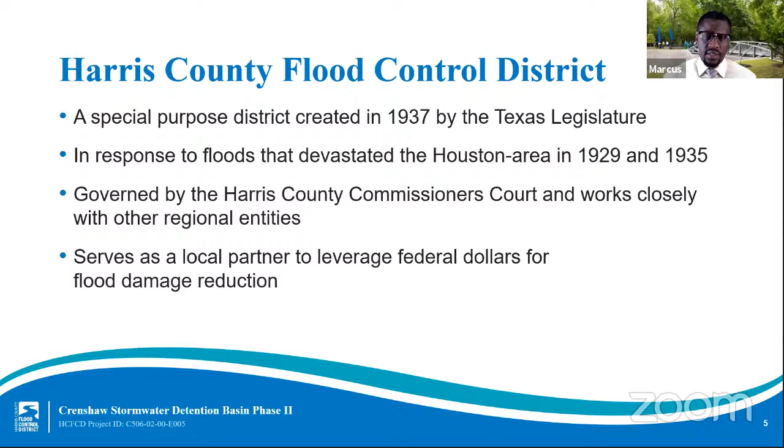The mission of the Harris County Flood Control District is to provide flood damage reduction projects that work with appropriate regard for community and natural values. One of the most difficult challenges we face is constructing effective projects that are sensitive to community and natural values in a highly urbanized area.

Harris County includes 22 main watersheds, totaling approximately 1,800 square miles and more than 2,500 linear miles of channel. 2,500 miles is approximately the distance from New York to California. A watershed is a geographical region of land that drains to a common channel or outlet. Each watershed has its own unique characteristics and needs. The project we're presenting tonight is in the Sims Bayou watershed, located in southern Harris County.

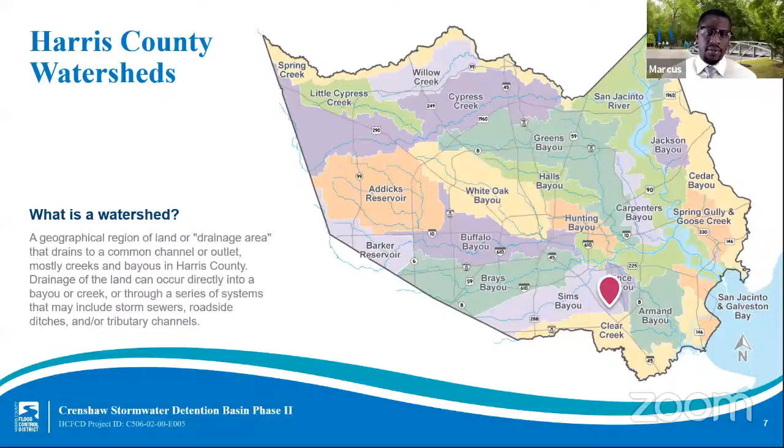Our area is flood prone, and here are some reasons why. We experience extreme rainfall, including tropical storms and hurricanes. We have flat, slow draining land, and we also have clay soils that do not soak up excess rainfall quickly.

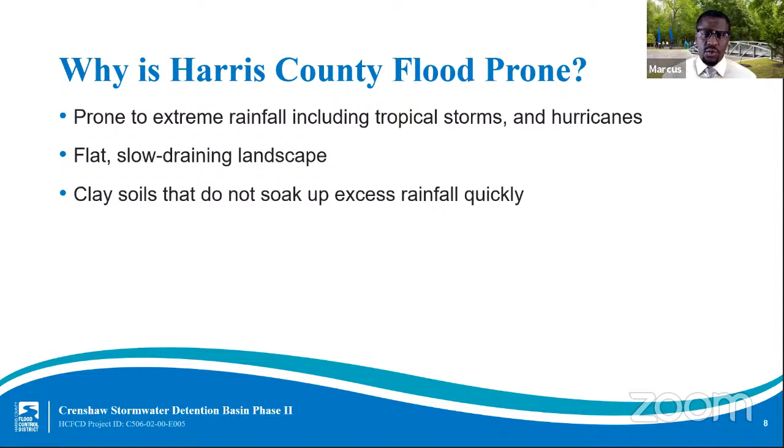While the Flood Control District plays a critical role in flood risk reduction, we are one of several entities involved in these efforts in our region. When rain falls on your roof, it flows through several jurisdictions such as streets and drains managed by Harris County Engineering Department, a municipal utility district, or cities such as the city of Houston, before it flows into a larger channel, creek, or bayou that the flood control district owns or maintains.

This slide illustrates the various jurisdictions, which sometimes we even share with other entities. Inside neighborhoods, as shown on the left side of this illustration, storm sewers and roadside ditches collect stormwater runoff and start the process of moving it away from streets and homes. Storm sewers and roadside ditches are the responsibility of the underlying municipality. The larger bayous and channels that take in the collected stormwater and move it through our drainage system to Galveston Bay are the responsibility of the flood control district. This is shown on the right side of the illustration.

In the middle is a stormwater detention basin, sometimes constructed by the flood control district. When storm sewers are increased, this creates an increase in runoff. Since it is our policy to avoid impacts to property downstream, detention basins have to safely take in and temporarily store excess stormwater during heavy rain events. Often, we partner with Harris County precincts, utility districts, and others to add recreational amenities such as trails to these basins and along our channels.

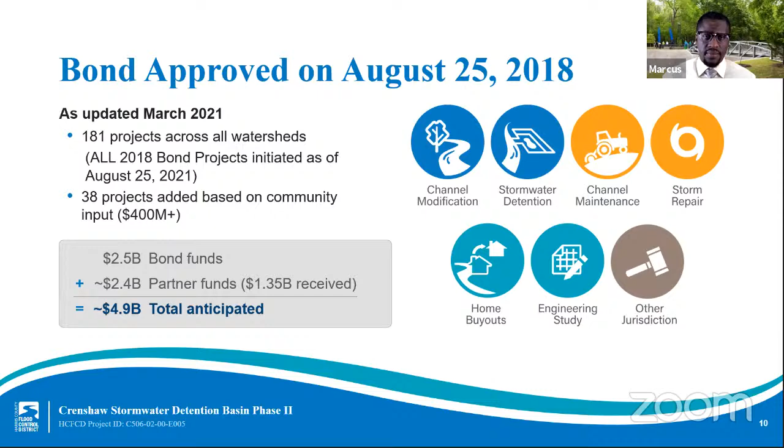While the bond was for $2.5 billion, the full cost of every project in the bond table is almost $5 billion. So we made it clear from the outset that we would need funding partners to fully construct the projects in the bond program. As I've mentioned, we've had some success so far, having secured more than $1.35 billion in partner funds. This graphic illustrates the many sources of those partnerships, including federal, state, and local funding that the Flood Control District is working to secure for Harris County.

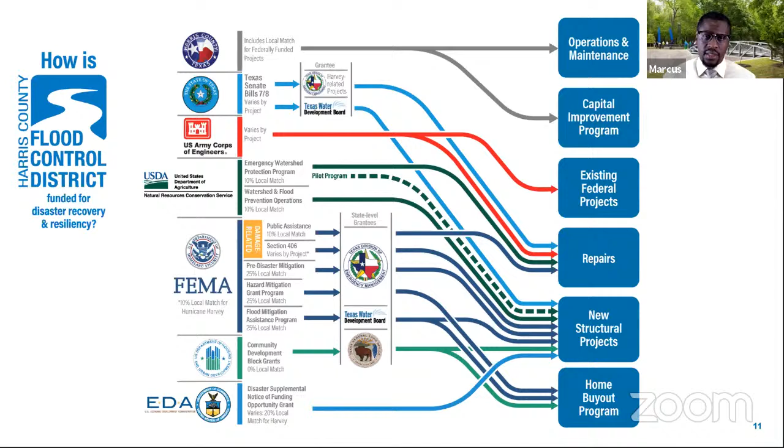Each agency has its own definition of eligible projects and its own requirements for local match funding, so the Flood Control District works diligently to match projects to the right partnership opportunity.

We will now move into the part of the program that is specifically about the Sims Bayou watershed and phase 2 of the Crenshaw Stormwater Detention Basin project.

The Crenshaw Stormwater Detention Basin is located within the city of Houston, east of the intersection of Galveston Road and south of Shaver Road. The purpose of the proposed detention basin is to provide additional stormwater storage for channel C106-08-00. This project is an extension of an already existing stormwater detention basin in the area and will add additional flood mitigation for the Arlington Heights subdivision.

This project is currently in the design stage of the overall project lifecycle. This stage is expected to be completed in fall of 2021. The project will go to bid in winter of 2021-2022, and construction will begin in the spring of 2022.

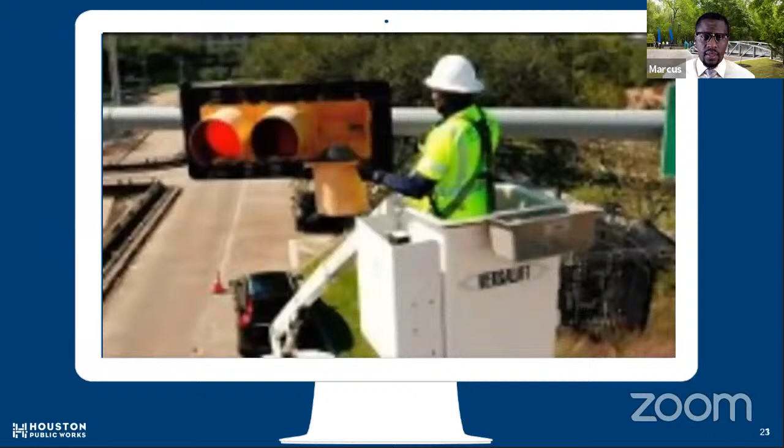First, I'd like to play a brief video highlighting the services provided by Houston Public Works.

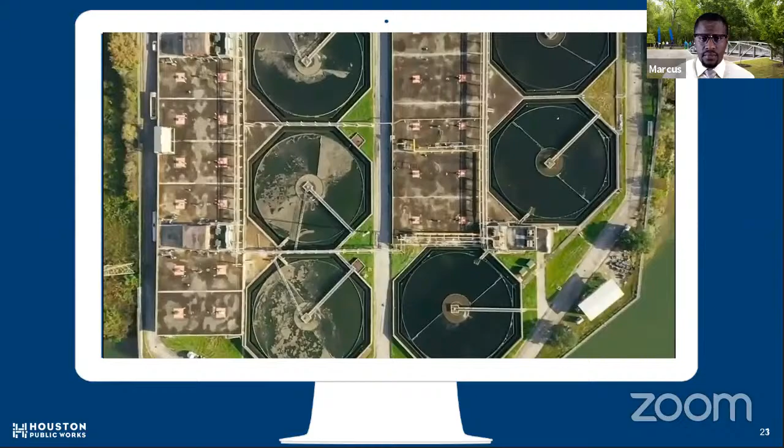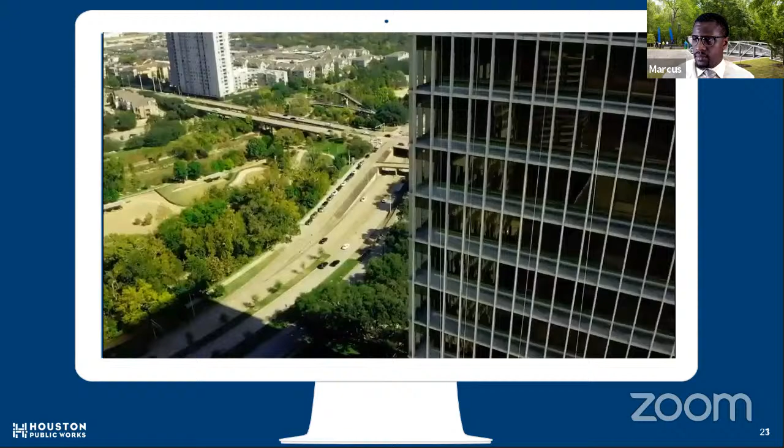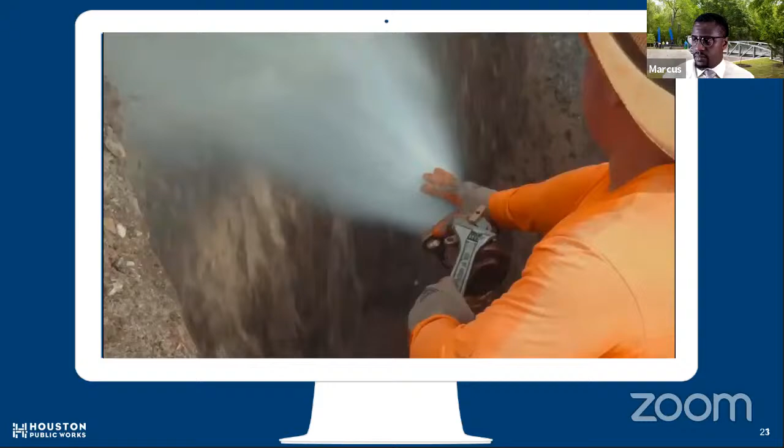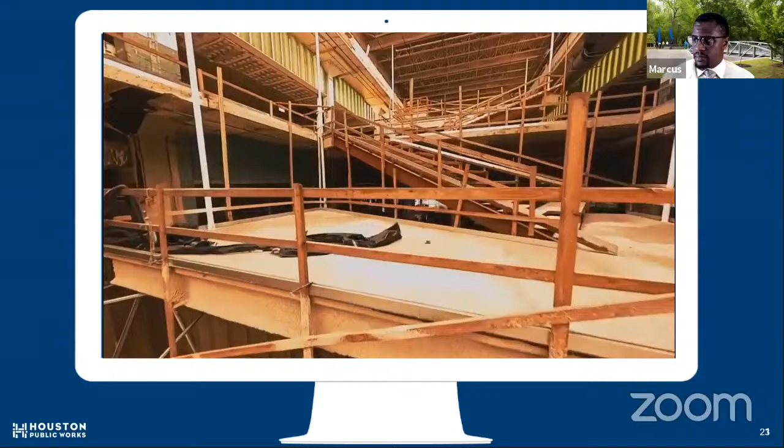Houston Public Works is responsible for the daily tasks you may take for granted. You may not notice us, but we work around the clock to support you. We are the foundation for life in Houston. Houston Water distributes enough fresh water to fill the Astrodome 4 times a day. Transportation and drainage operations handles 16,000 miles of streets, signs and street names and thousands of drains. The Houston Permitting Center regulates hundreds of projects so you can work, play, and live safely. Customer Account Services ensures 2.1 million people have access to safe drinking water with efficiency, accuracy, and flexibility. Capital Projects manages the critical improvements that make Houston better every single day. Houston is always moving towards growth, innovation, and progress. We are the largest, most diverse public works organization in the country. We are one team with one purpose. Together, we create a strong foundation for Houston to thrive.

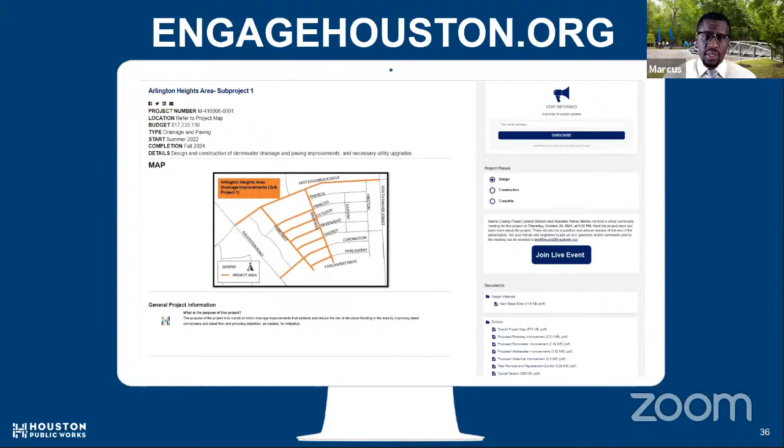The city is nearing completion of the design phase for subproject 1. The construction phase will begin in spring of 2023 and will be completed in 2025. The design phase for subproject 2 will be in 2023, and the construction phase will begin in 2025.

I will now turn this back over to Sparkle to kick off the Q&A.

Sparkle, you're muted.

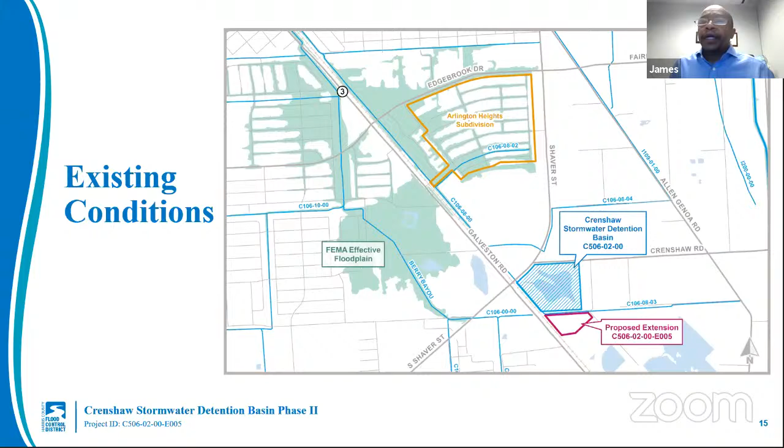This is the Arlington Heights project. We basically have two sub-projects, sub-project 1 and sub-project 2. Sub-project 1 will need to be completed before we can start working on sub-project 2. Sub-project 1 is expected to start construction in spring of 2023 and should take about two years, going all the way to spring of 2025. We'll then have sub-project 2, which begins in fall of 2025, and that should also take about two years to complete.

Sherry, this next question is one we get often: how is this project funded? This project is funded through the city's capital improvement program. The funding sources include drainage fee, combined utility service for water and wastewater improvements, and property tax.

James, the next question is: will there be any road closures or traffic impacts during construction? Yes, we do expect there are going to be road closures as we work on the project. However, the project is set into phases. The City of Houston has a traffic control plan in place, and anyone affected during construction will be informed prior to the construction taking place. With this plan in place, we'll ensure that traffic continues the best we can, with minimal impact to your commute.

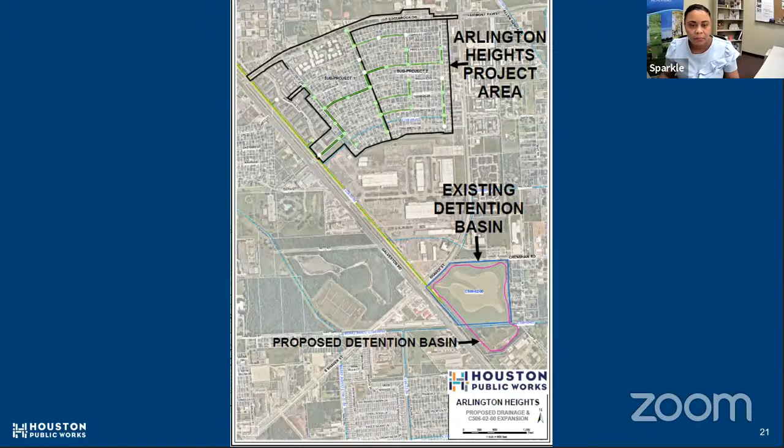I'm going to pass that question to Jonathan St. Romain. Thanks. So

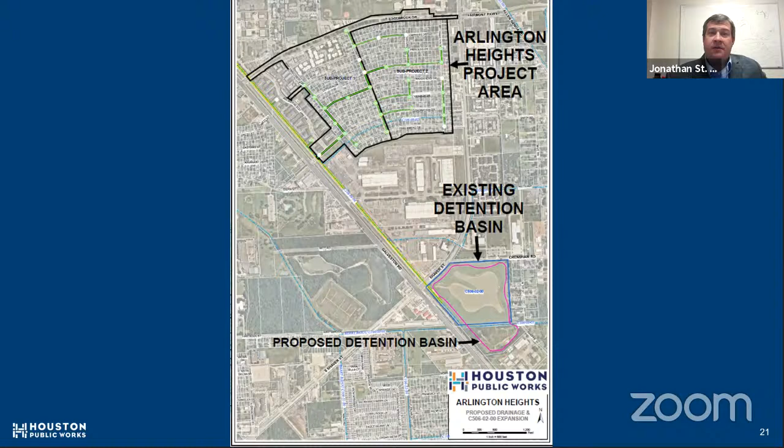This basin does not technically work with the South Shaver Basin in terms of needing to be built at the same time or together. They do happen to be close by and are in similar locations within the watershed, and so they do help flood mitigation in similar areas. They will help reduce flood risk in the nearby streets and neighborhoods, but they are technically not related to each other or part of the same project.

All right, thank you. Marcus, will you take this next question? What will the project accomplish?

So the project will accomplish two things. One is increasing the conveyance within the internal system of the neighborhood, which is the Arlington Heights subdivision drainage improvement project. The second thing it would do is mitigate any impacts related to that increase in storm sewers by extending the existing detention basin at C506-02 to provide additional volume for the additional flow we expect to be introduced into the channel with the increasing of the storm sewers.

All right, Emmanuel, our next question is for you. What stage is this project?

Thank you, Sparkle. The Crenshaw Stormwater Detention Basin project is currently in the final design stage. This stage is expected to be completed in fall of 2021, and the construction process is anticipated to start in spring of 2022. For the Arlington Heights project, it's currently in design, and bids will go out next year, and the contractor will be selected. Once a contractor is on board, the City of Houston will schedule a virtual community meeting to discuss how to prepare for construction. The construction is to be completed in 2024.

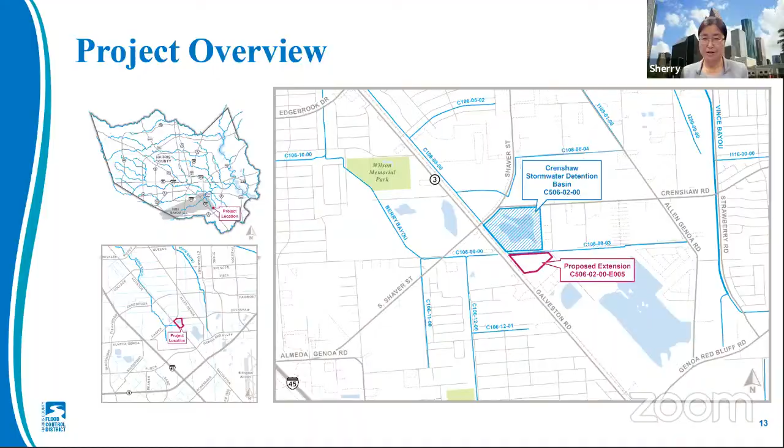Yes, Sparkle, thank you. The short answer to that question is yes. Our contractor will make sure the homeowner or anybody visiting the home will have accessibility to and from the home at any time. There will be a short time where you may not be able to park your car on your driveway while they're working on that portion within the city right of way. During that time, it will be temporary, and we will work with you and your neighbors to see whether you could park your car on a nearby street.

All right, Jonathan, we have a question on traffic coordination. Will there be traffic coordination with the local schools like Yes Prep?

Sure, yeah, we will coordinate that as much as possible. I don't know exactly where Yes Prep is, so I can't speak specifically on that spot, but in general we do coordinate when we have these big construction projects that put a lot of heavy construction traffic and dump trucks out on the streets. We do coordinate that with the surrounding areas. I know sometimes our questions can get very specific to our neighborhood, community, or specific home. For those questions that we aren't able to answer in detail in this format, I want to remind everyone that we will be following up after the public comment period. You'll receive a response from the Flood Control District and/or City of Houston Public Works. So we do want to make sure we answer all of your questions.

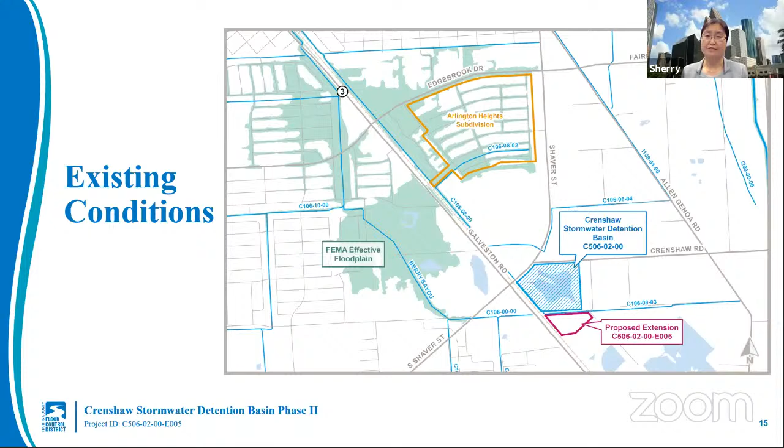Is there a plan to open Coronation Street from Galveston into the neighborhood? The map shows the drainage improvement, but currently the street doesn't connect from Arlington Square Street. Okay, short answer for that is no, we will not open the street. Yes, the drainage will go through, but on the surface you will have the same condition after the project is done.

Okay, thank you. All right, our next question is for you, Marcus. This is one of those cases where we know what a detention basin is, but a lot of the general public does not. Would you explain what a detention basin is?

Yes, so the best way I can explain it is that it's an excavation of soil below the natural ground as it exists today. It serves one of two purposes. One would be to mitigate an impact that results from increasing the size of a channel, storm sewers, or roadside ditches, preventing impacts from transferring downstream. Or two, it could serve by itself as a flood damage reduction tool within the Harris County Flood Control District toolbox. It works by taking flow off the bayou to prevent it from going into streets and homes and getting outside the banks, holding it there. Once the storm passes and the channel starts to recede, it lets that water out slowly. So it could serve one of those two purposes, or at times both, which we refer to as regional facilities.

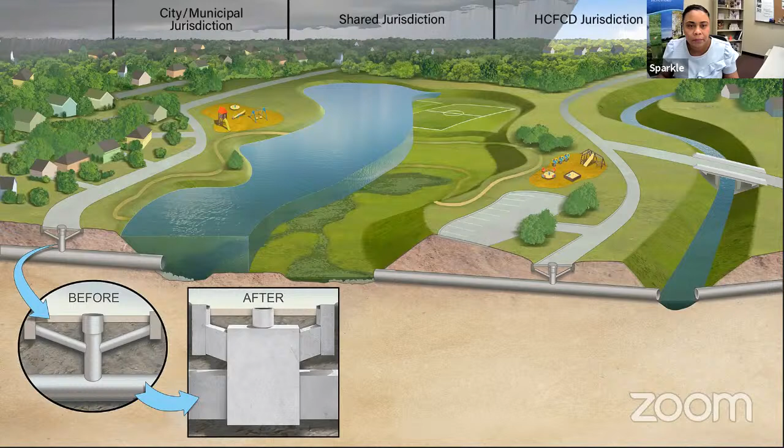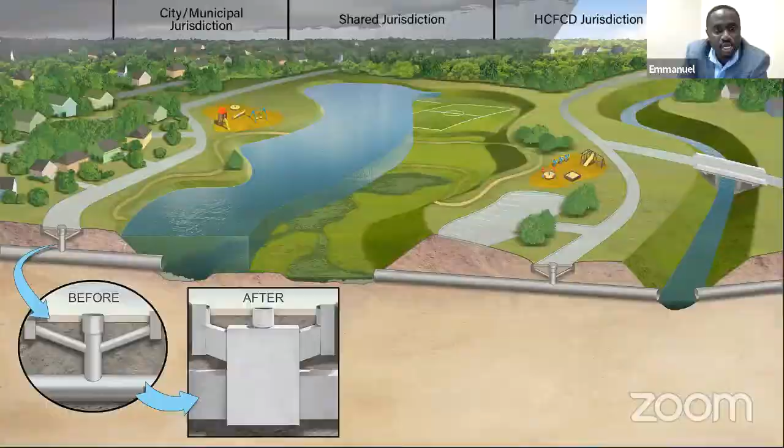All right, thank you, Emmanuel. The next question is, why are there multiple phases to this project? Thank you, Sparkle. For the Crenshaw Stormwater Detention Basin, the second phase was added due to the availability of an additional tract of land that could be used to mitigate the drainage improvements at Arlington Heights. Now, city representatives will address the phasing of their subdivision project.

All right, thank you. Marcus, here's another question. If you're improving flooding in this area, are you just flooding another area as a result?

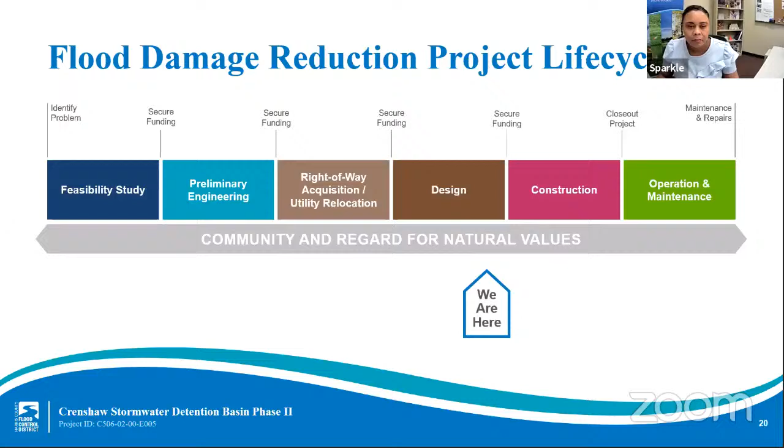Yes, and that's again another good question, but the answer is very similar to one I've mentioned a couple of times already. Our policy, the policy of the flood control district, is to not transfer risk or cause downstream impacts. It's something we hold developments to, as well as ourselves and our partners across the greater Houston area. There are engineering analyses that take place where we have to prove to ourselves, and have others prove to us, that the project being constructed doesn't transfer flooding risk to another area. Specifically for this project, the detention basin is upstream of where the improvements are happening. But what it's doing is taking flow off the channel before it goes downstream, allowing the City of Houston to increase the size of their storm sewers to get the water out faster. So the elevation, what we call the existing condition versus the proposed, is actually lowered upstream below the top of banks so that additional flow can be added further downstream.

Marcus, do you mind if I tag along a little bit to that one? Yes. And Sparkle, do you mind going back to that overall regional view, please, with all the projects?

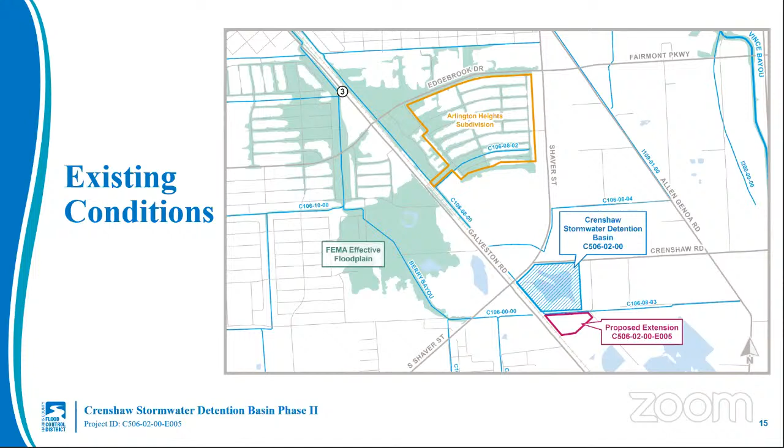Our next question is: how can I learn more about the projects going on in Sims Bayou watershed? We have a wealth of information on our website, and I will never miss an opportunity to encourage people to log on to hcfcd.org and find out more about their watershed of interest. If you're interested specifically in Sims, please log on to hcfcd.org/Sims. We encourage you to check it out - we are constantly updating the website.

This next question is for Emmanuel, from Shayla. Shayla asked, what are your plans for the Crenshaw Detention Basin? All right, I'll pass that on to Jonathan.

Sure, let me turn myself on here. Our plan for the Crenshaw Detention Basin is to expand what you see out there today. If we can look at the map that shows what's existing - there we go. The polygon, the shape you see down there on the south outlined in purple, is our proposed extension of the stormwater detention basin, and everything to the north is what exists there today.

That shape highlighted in purple represents the parcel, the tract of land that the flood control district has purchased. When this goes to construction, you'll see lots of excavation in that area - excavators and dump trucks hauling dirt and material away, so that the parcel of land that's just a flat field with some trees on it today will be joined in with the existing detention basin, becoming one much larger detention basin.

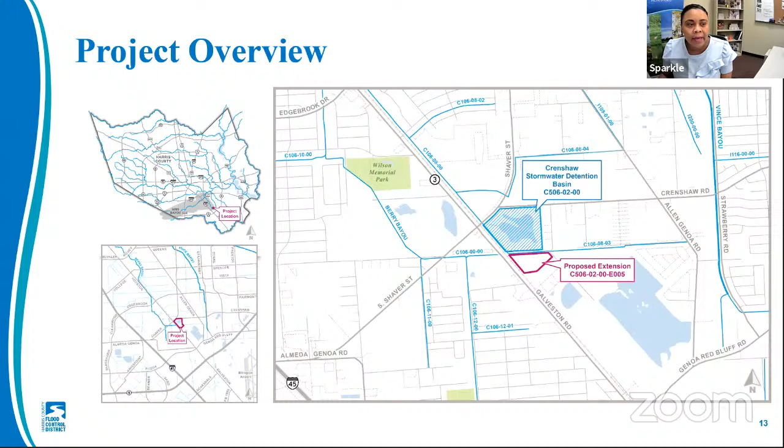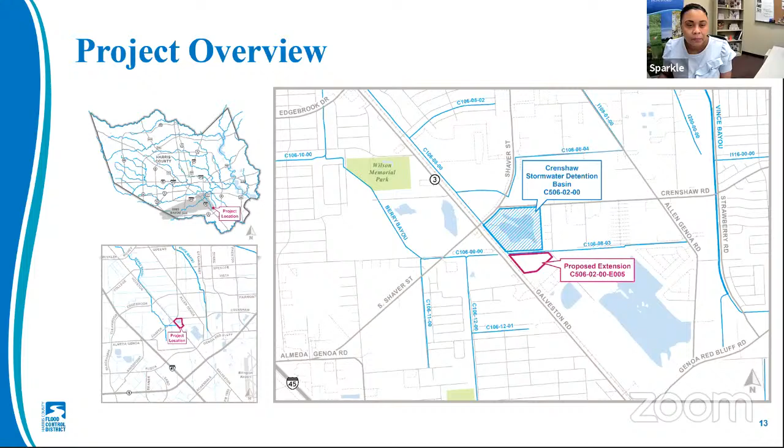So the project overview here, we're looking at two projects. One project, Harris County Flood Control District is leading, and the other, the City of Houston is leading. The Flood Control District's project is to expand an existing detention basin to provide some extra detention volume.

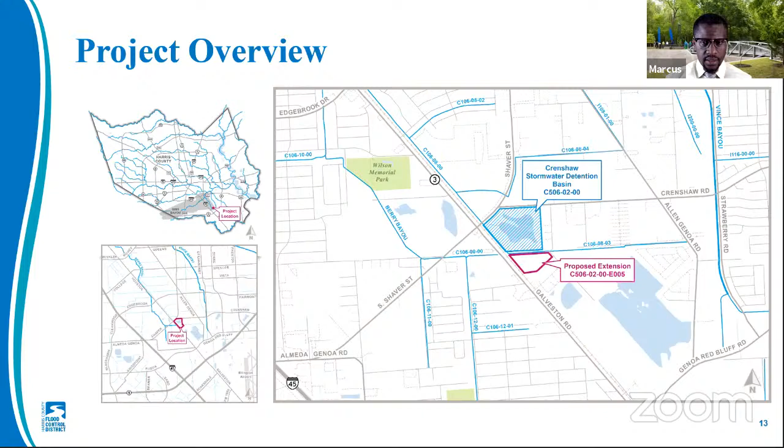Next slide, please. So our current timeline for the project, we're currently in the design phase. We plan on wrapping this up fall or winter of 2021, 2022. Then in winter of 2021, we plan to go into bid and start the construction process in the spring of 2022.

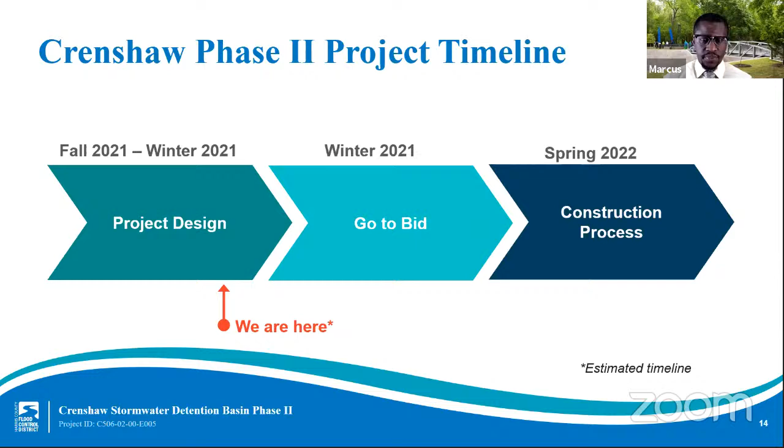So the existing conditions of today, we're showing here what you see in the teal color, which I may have said was blue last time, is the actual FEMA effective floodplain for C106. You'll notice some of the green areas going into the subdivision, which represents the riverine flooding. The actual depths of inundation typically experienced by the neighborhood is probably more than this, just because there was an internal system issue that needed to be developed as well. To the south of that, you see where we plan on extending the existing detention basin C50602.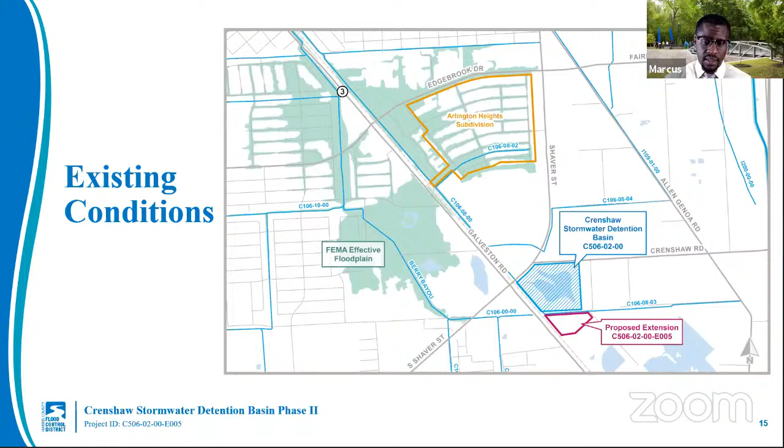Here's an exhibit of where we plan to extend that basin, along with an artist's rendering of what that basin would look like. The primary objective of this project is to reduce flooding, and also provide the City of Houston with some mitigation volume for their project in Arlington Heights. Again, this would just be an extension of the existing facility onto vacant property to the south.

So this exhibit is meant to show how that detention basin functions. Soil is excavated from what I previously called natural ground - this would be the area between where it says detention storage. Imagine all of this is full of soil or dirt; we excavate that out so that water from channel C106 08 can flow into the channel during major storm events, and during normal events it'll just capture runoff from areas around it.

So once C1060800 becomes full, the detention outlet shown on this exhibit holds the water in and allows it to slowly go back into the channel as the channel water starts to recede. Once the elevation in the channel is higher than the basin, or they're the same, that water is held until there's enough difference in elevation between the detention storage and the channel to allow that water to go out slower after the storm has passed.

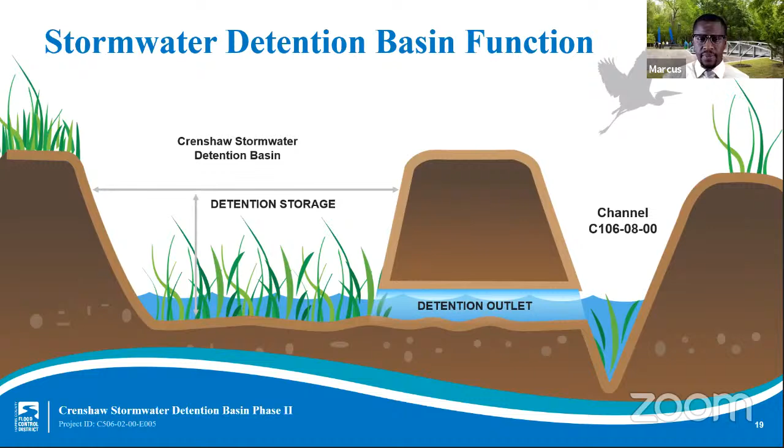This exhibit shows what I just described, with the water starting to come out of the detention outlet once the elevation in the channel has receded. As I mentioned, we are currently in the design stage, planning to have that wrapped up in winter of this year and move into construction by spring of next year.

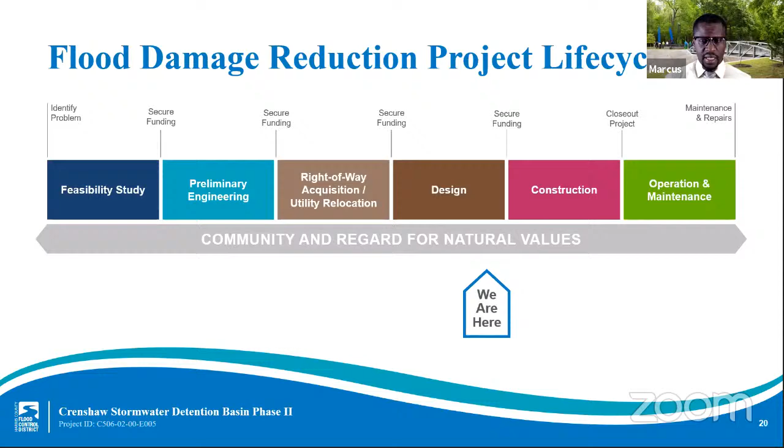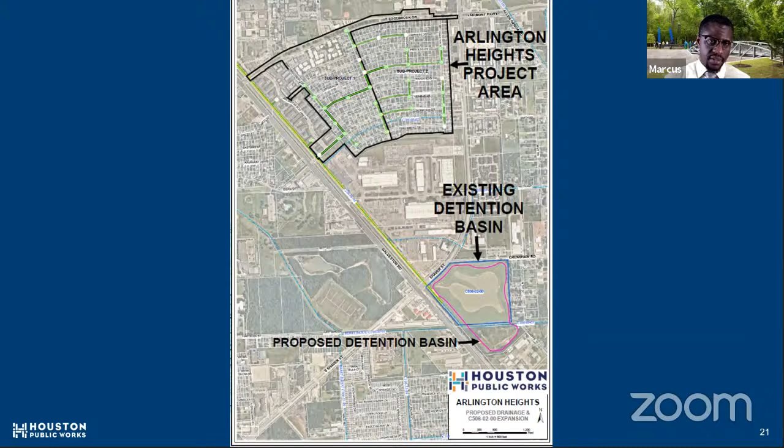This overall map gives you a further zoomed-out view of the existing and proposed detention basin and sub-projects 1 and 2 of the Arlington Heights project area, which I will discuss now. I don't think we need to play the video again. There we go, thank you.

So the area to the west, in the west part of the subdivision, is sub-project 1. The area to the right in green is sub-project 2. The city plans to construct sub-project 1 first, followed by sub-project 2.

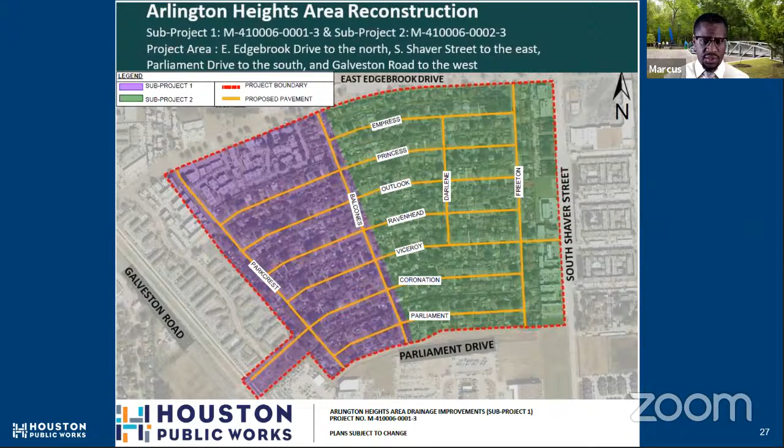Marcus, you're muted. Sorry, did I accidentally mute myself? I think so, okay.

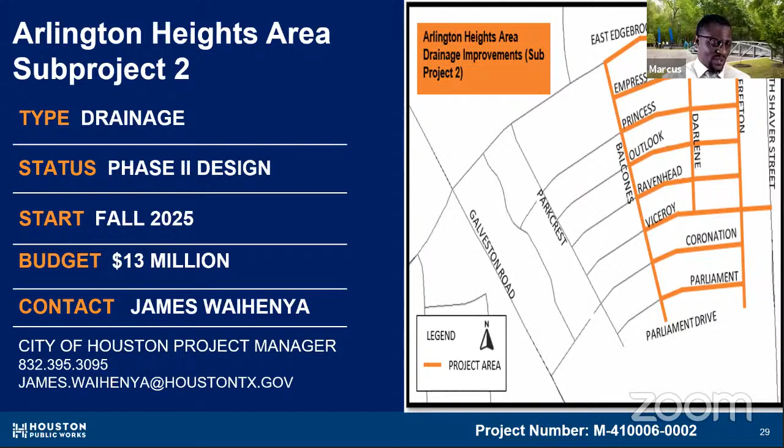Sub-project 2 is also a drainage project. It is currently in phase 2 of design, with construction start in 2025 and a budget of $13 million. James Waihenya is also the project manager for this project.

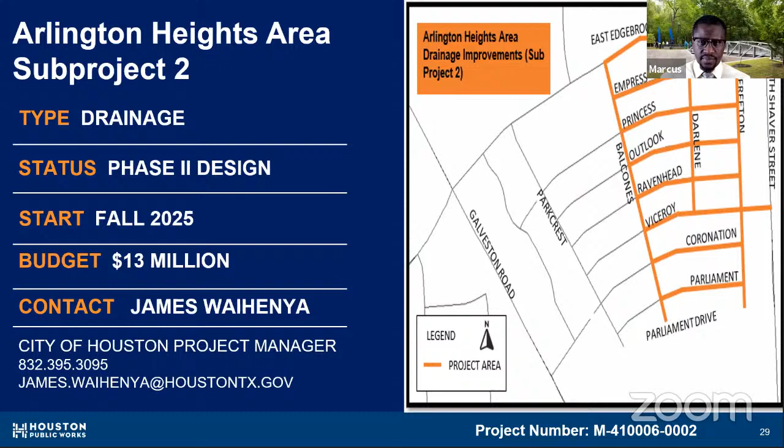The City of Houston has several improvements planned. These include storm drainage system reconstruction with 5-foot sidewalks and 4-foot buffers, addition of new streetlights, water line replacements per city standards, and storm sewer replacements also per city standards.

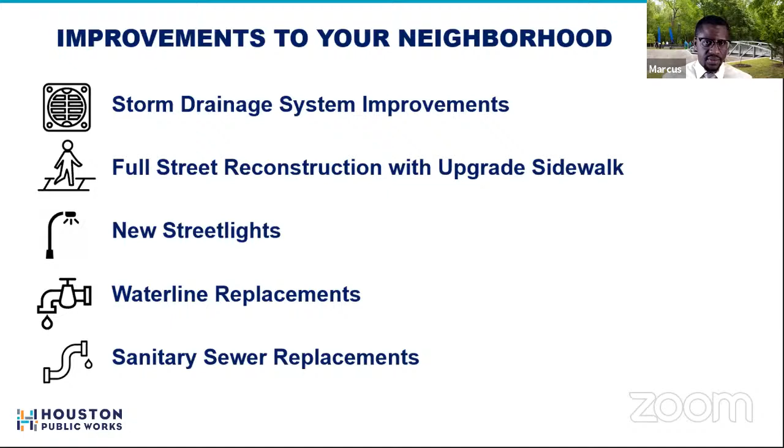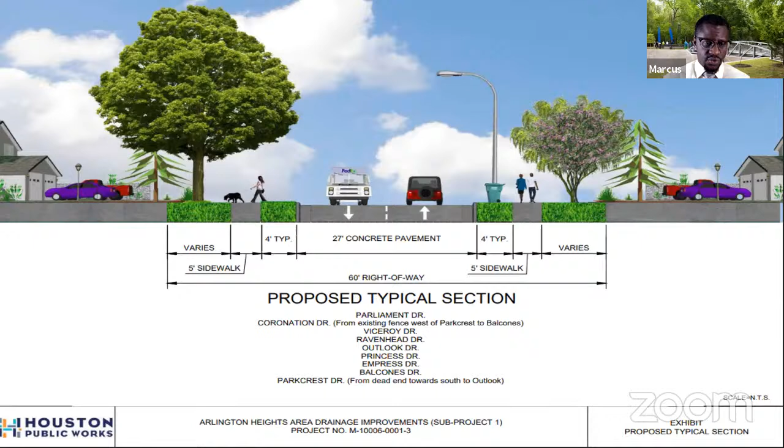Here is the remaining portion of sub-project 1 with the same 5-foot sidewalks and 4-foot buffer within the 60-foot right-of-way. It includes Parliament, Coronation, Viceroy Drive, Ravenhead, Outlook Drive, Princess Drive, Empress Drive, and Balcones Drive, and Parkcrest Drive from the dead end south towards Outlook.

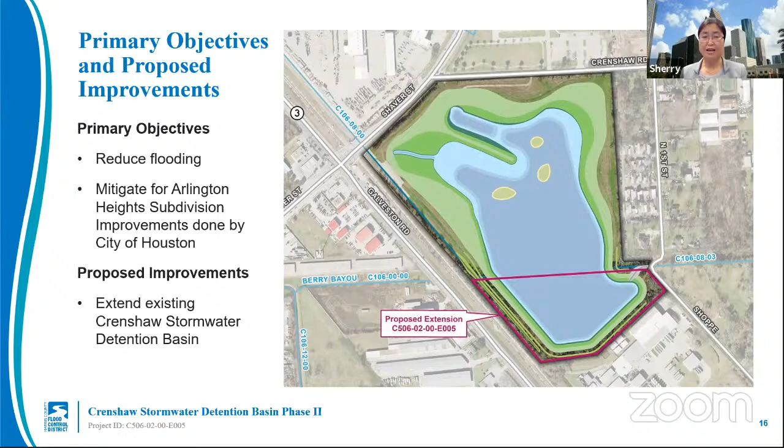It's a great question. Before construction starts, about a month before, we will come out again to do another public engagement meeting with the neighborhood. During that meeting, we will also have our contractor on board, and we will talk about what you can expect during construction and prepare you for it.

With that, I'd like to share one final reminder that we are continuing to accept comments and feedback on this project through November 12th, 2021. We also encourage everyone to get flood insurance, as flood season in Harris County runs year-round.